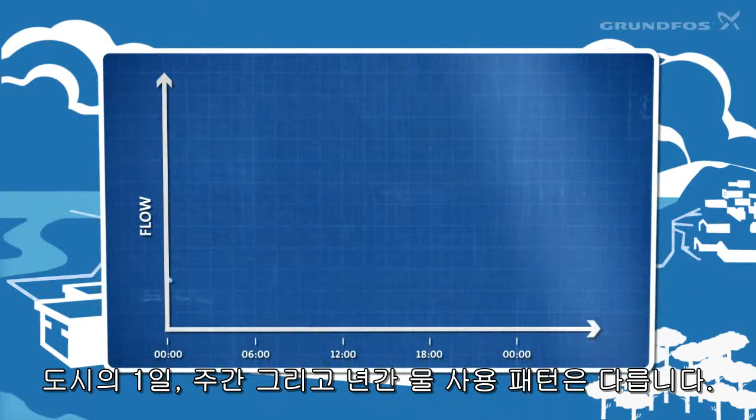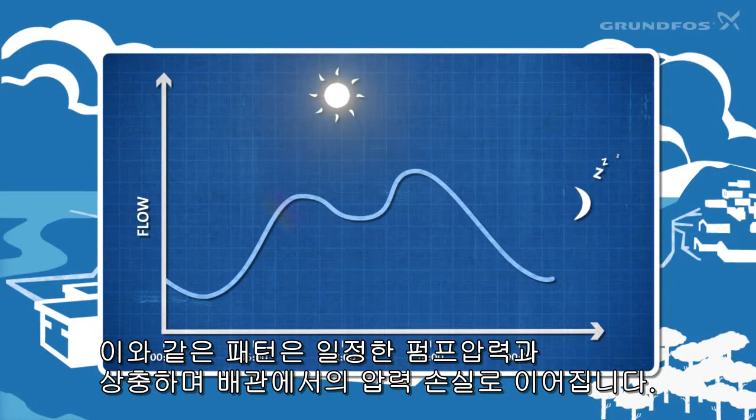Water leakage is a serious problem worldwide. In many cases, water leakage is made worse or caused by constant pressure from the pump. In any municipality, water consumption varies over the course of the day, week and year. These variations cause a problem with constant pump pressure, and they also affect pressure losses in the pipes.

When the pressure remains constant at the pump, but the flow changes to meet the varying demand, pressure changes at the critical point. These fluctuations in pressure throughout the system increase stress on the pipes, cause water leakage to rise when there is little demand for the water, and waste energy.

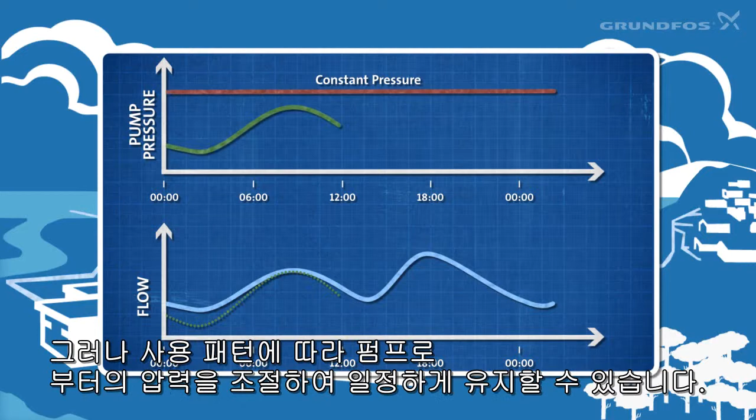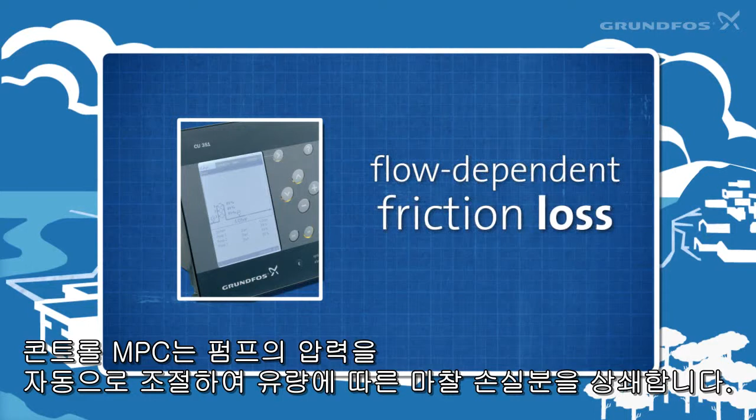Varying demand and higher flow leads to higher friction losses. If the constant pressure is set according to the friction losses at peak hours, the pressure in the pipe network will increase during quiet periods with less flow. But with flow-dependent pressure from the pump, the pressure stays the same, even at the critical point. The control MPC adapts the pump pressure automatically to compensate for the flow-dependent friction loss. The net result is a reduction in water leakage of up to 20%.

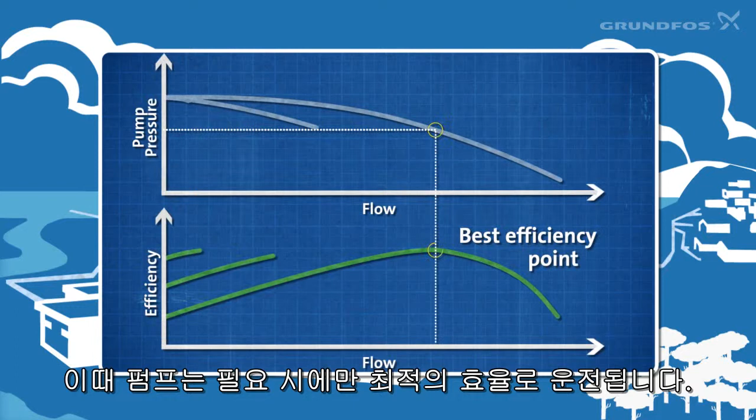Instead of a single large pump running at only one best efficiency point, you can use several smaller pumps, lowering energy consumption. Each of these pumps runs at its optimum efficiency, and only when required. Combining multiple smaller pumps with intelligent pump control reduces up to 20% on energy consumption.

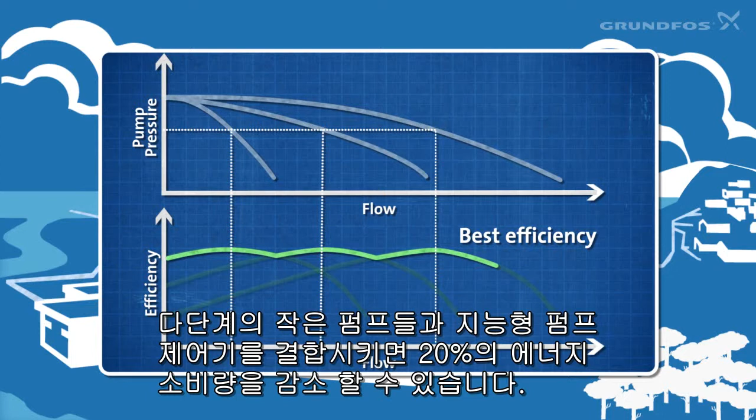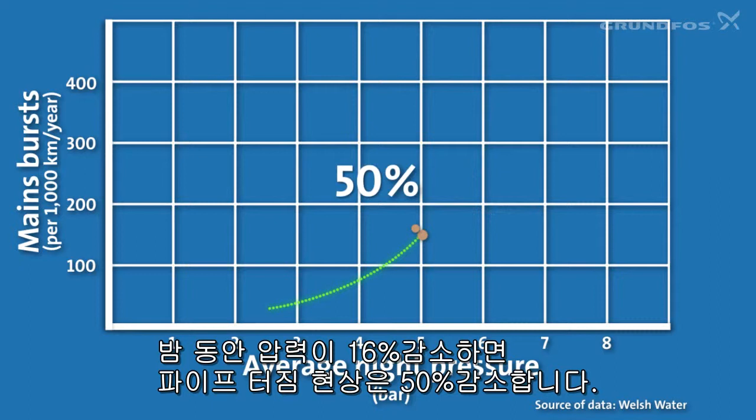Demand-driven distribution also reduces water hammer in other ways, for example by the soft build-up function. If pressure drops in your system during a pump stop, the MPC unit will slowly rebuild the pressure. In fact, the system fills up the pipes before it builds pressure. This is much gentler on the pipes, so you achieve fewer pipe bursts, reduced repair cost, extended asset lifetime. Which brings us to our next point.

We say that a demand-driven distribution system keeps the water pressure at Mrs. Smith as high as she needs it. But how do we know the pressure at Mrs. Smith? Actually, we don't need to know for sure all the time. We just need to have a pretty accurate idea about the variations in demand over the course of a day, a week, even a year. When do these variations occur? Well, it's usually quite easy to predict.

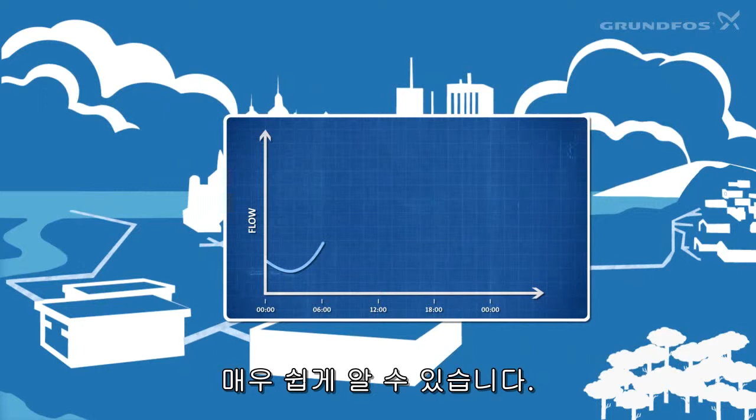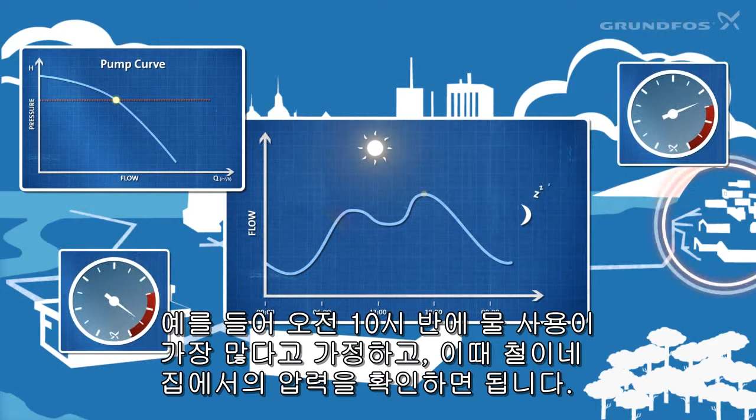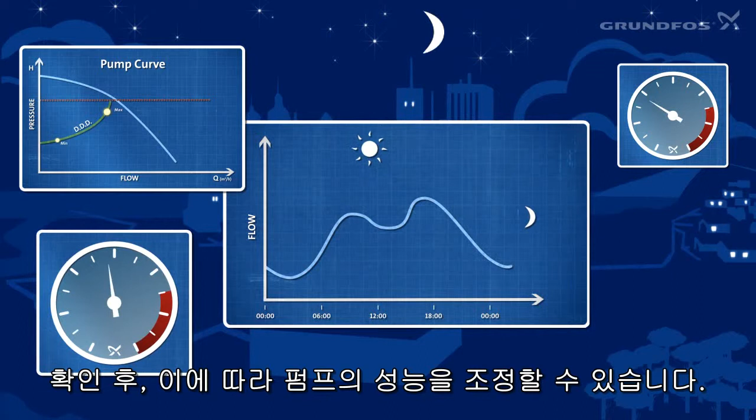Let's say that here, the maximum demand for water occurs around 5:30 p.m. Then we need to check the pressure at Mrs. Smith. If it's too high, we can turn down the pump a little. We find the minimum demand for water is at 3:30 in the morning. So what's the pressure at Mrs. Smith then? When we know, the pump's performance can be adjusted accordingly, although we must, of course, maintain the minimum pressure required to avoid contamination through leaks into the pipes.

The default setup in the demand-driven distribution system will automatically create considerable savings. But if you want to optimize the proportional pressure curve even further, demand at the critical end user can be measured manually with a pressure gauge, with a data logger, or with a radio transmitter that sends back data to the MPC pump controller.

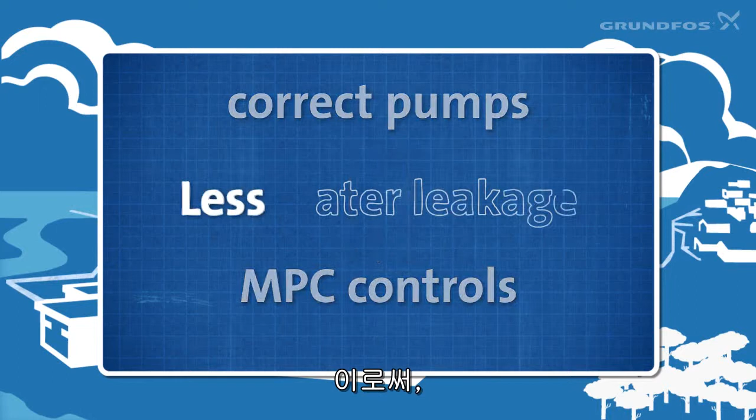Demand-driven distribution systems may be based on complex calculations, but they are simple to create. Based on the consumption profile, we select the correct pumps and combine them with MPC controls. Then you are well on your way to less water leakage, lower energy consumption, lower maintenance costs. Demand-driven distribution is based on proven technology used in more than 50,000 installations worldwide. We simply use it in new ways.